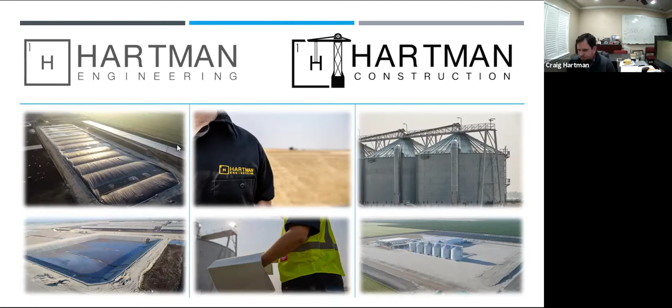I am Craig Hartman, I'm the principal engineer of the company, the CEO, the president. I am the special projects manager, so I get involved in a lot of research and development projects, new markets, new issues, new problems, new regulations. If people get into lawsuits, I usually get involved with those too, as an expert witness in many different lawsuits. It's very interesting. I am a Cal Poly civil engineering graduate of 2004.

And my sidekick for today is Mr. Chris Canada. Oh yeah, I'm Chris Canada. I recently graduated from Fresno State University, 2021. I actually got hired by Craig before I graduated from state, I was actually still taking classes. I passed my EIT about 4 months ago, and I'm an associate office engineer and a lead surveyor. I focused on water resource management and transportation at Lyles College of Engineering, and I really found a good home here at Hartman Engineering.

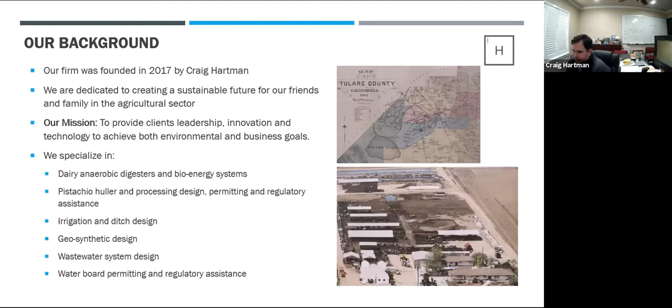So, why Hartman, right? You always want to know the why. You got to ask yourself, why am I getting into something? Why am I doing this?

Why Hartman? Number one, the state of California is suffering a catastrophic water quantity and water quality issue. That's what we're suffering right now.

We're facing this, and I'm going to explain as best I can. Number two, the Earth's climate is changing due to greenhouse gas emissions. I don't want to argue politically on this, but things are changing, and there's an entire movement to seek out and not create CO2 or greenhouse gas emissions, and that's one of the things we do.

So the dairy digesters, if you look at how many we've done nationally and how much emissions we've reduced, we're very high on the climate change reduction list in the nation for what we've already reduced based on those projects. That's exciting to me.

Because of this, we're equipped to assist what I consider the transformation of agriculture. The market is transforming. We want to be a leader. We want to show these folks how to make those moves in the near term to evolve and stay in the game with all these environmental conditions.

So when you put all this together, we do engineering consulting, we do general contracting. And why do people seek us out? It's because we deliver solutions.

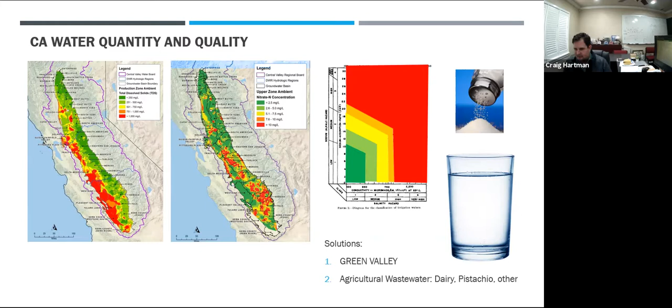So the water in the glass is getting less and less, and the salt shaker is going faster and faster, equaling a compounding issue in which the concentration of salts is exponentially going off the curve. So that is the problem, folks. That is what we're up against, and we're trying to solve it. Next slide, please. So how are we trying to solve it?

In many ways. We do have a project going on at Cal Poly. They have this problem right now. They have farmland, it's almost like a little city, and they're doubling their housing on campus, and they're going to add like 40% more students, and there's no water in the area. So what's the solution? Well, it's something I pitched them as a senior project 16 years ago. So what are we going to do?

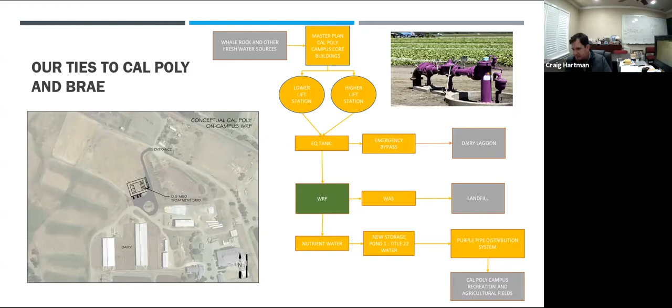And so fundamentally, this is something that we're doing on a project of this scale in a small little city, and we're doing it in many, many other places as well. Next slide. So another aspect of this is the digesters. Yes, we do a lot of digesters. We're good at them.

Fundamentally, they are part of this whole water quality, water quantity item that we're working at. They're working on the nitrogen side of things. We have a video for you to kind of explain this. Chris, can you hit it real quick? And then after the video, I'll get into it.

Farms have a crucial and essential role in being a solution to climate change. I really appreciate BMW's willingness and collaboration in helping us create a viable farming system. Renewable energy is a key component to the sustainability strategy at BMW. The partnership with Straus Organic Dairy Farm through the Low Carbon Fuel Standard program is helping make this a reality here in California. Collaboration is essential to creating this model of a farm to electric vehicle pathway.

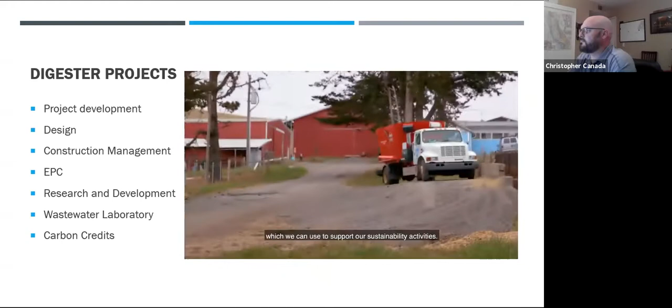The Low Carbon Fuel Standard program provides incentives to automakers to partner with renewable generators to bring more renewable energy to their electric vehicle drivers. Together, through this partnership, Straus and BMW earn credit revenue, which we can use to support our sustainability activities. BMW is using our part of the LCFS credit revenue to provide incentives for drivers who participate in our smart charging program in Northern California.

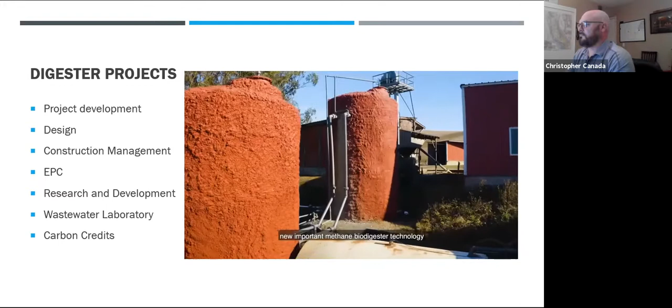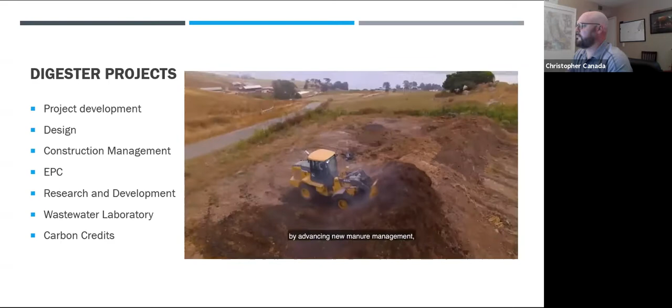The Straus-BMW partnership is allowing Straus Family Creamery to invest time and resources to investigate new important methane biodigester technology that overcomes traditional barriers that have inhibited small organic dairy farmers from adopting this technology in the past. As investment comes in from the Low Carbon Fuel Standard program, organic dairy farmers are able to take that investment and maximize their climate impact by advancing new manure management, carbon sequestration, and methane mitigating solutions.

The exciting thing about dairy biodigesters is that they create a double carbon emission reduction. On the one hand, they capture the manure and methane emissions that would otherwise be released on the farm and go into the atmosphere. And they also can be used to produce electricity, which replaces fossil fuel generation on the grid. Everything we produce goes up through the electric lines and it virtually goes into electric charging stations for BMW cars.

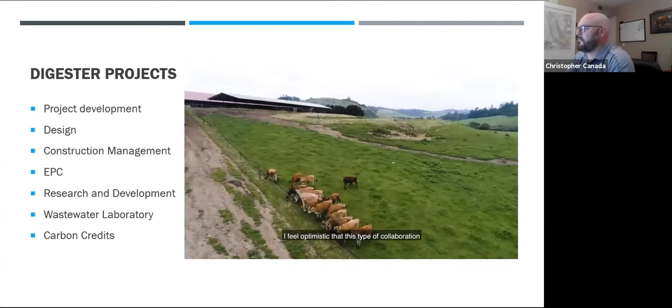I feel optimistic that this type of collaboration and these types of innovations are really going to effect change.

All right, so that is actually one of our projects. The technology there is ours. That is actually one of our laboratories, so we can model different things. And the reason we do that is because it's far from our office and we can show people that we can do things remotely. Because it's easy to do something when it's in your backyard. We used to have that in our backyard pretty much, and so we moved it so that it's 5 hours away. So it shows the ability to do things remotely, and I think that's important.

So we do all aspects from project development all the way through the design, construction management, EPC. So that stands for engineering, procurement, construction. And that's important because an EPC contractor and engineer is somebody that can actually warranty their work. I can warranty how much gas the site's going to make.

And that's a lot of the reason why we are moving up the food chain, or we're moving across the nation, is because a lot of the people that finance these projects are seeing that our warranties are true and some others aren't. And so we're having great success being able to do stuff correctly and warranty it. And by word of mouth, we're expanding in multiple states.

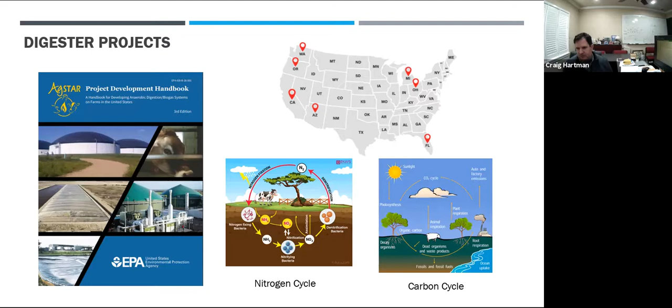Atmospheric deposition. So based upon denitrification, we can volatilize ammonia in a wastewater plant, and then that ammonia will come back down and deposit back into the land, and that's where another component of the nitrogen is coming from.

The largest component is coming from synthetic fertilizer. So where does that come from? Mines in New Mexico, Arizona, Utah. They're mining that with big excavators. They put it on a train. It's petroleum companies that are using a lot of petroleum products. They put that on trains. They bring it to big factories. They refine all this stuff. They make pellets for you, or liquid.

They put it on more trains, trucks, trailers. They take it and then they get it to your field so that they can produce your lettuce and you can eat that lettuce or something like that, right? So that's kind of where that infrastructure is coming from.

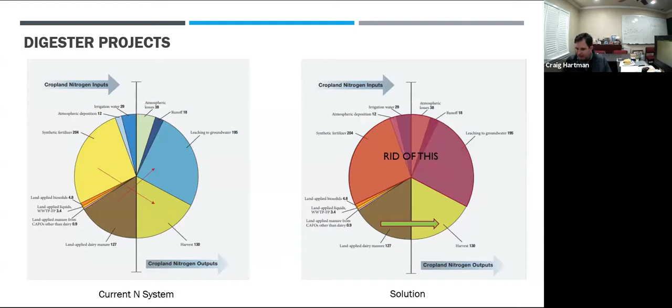Okay, so we're trying to get rid of what we consider the true nitrogen problem here and make this whole thing natural once again. And that's really what we're doing. We're using natural processes, understanding the natural world. We're using gravity and a few minor pumps to do all of this. Next slide.

Chris. All right, so it's kind of my turn here. So I think you can see why my water resource management degree really found a home here. I became an office engineer right out the gate. So the question might be, what does an office engineer at Hartman Engineering do? The short answer is essentially everything. From start to finish, the engineer in the office is in charge of collecting the data to the full creation of the construction set and all the steps in between.

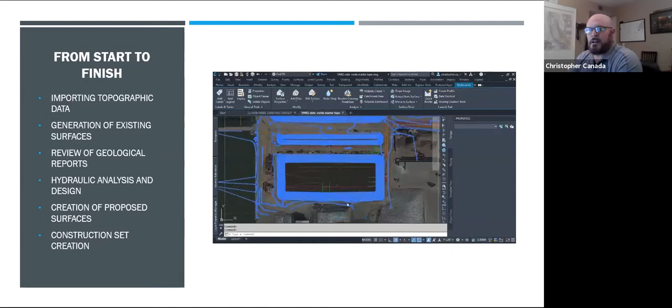So we take the gathered topo data, the topographic data, which is in this raw form you see on the right, which is essentially a point, northing, easting, elevation, and description. And then we import that data into a Civil 3D model. And then by using feature lines, grading features, stepped offsets, point file importing, we create an existing surface. And that surface is going to be used for the entire design of the project.

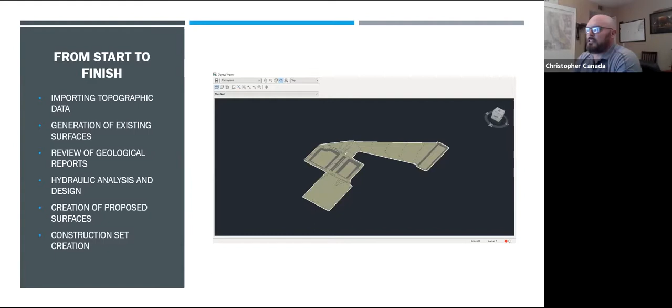So from that point, we review geological reports. And this is important. We take this data and we find out where the elevation of the water table is in the area, or specifically at that point where the digester is going to be. And we need this information because, like Craig said, there's a lot of water board standards and regulations in the state of California where we can't make a digester within 5 feet of an existing groundwater. So with our factor of safety, we create our ponds to be 6.5 feet.

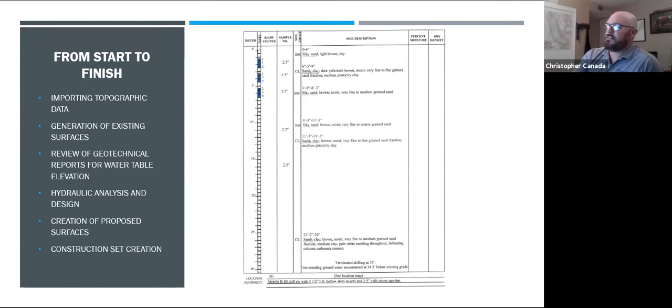So we use this information from this geological report, geotechnical report, to create a hydraulic analysis and design of the system. We can design a depth of pond based on the volume that we need from the wastewater management plan to determine how big the pond has to be, how deep it can be. And from that, we take an evaluation of what's existing on the dairy, and we figure out what will be the hydraulically critical point. And from that, we design the infrastructure for the entire project.

And this is probably the most complicated part of the design here. As an assistant office engineer, you're doing calculations, you're using the Darcy-Weisbach equation, you're using the rational method, all these things that we did in classes, you will use out the gate at Hartman here. So we take all that information and we physically design the system itself. So we're doing engineering out the gate from college right there. So that's the hydraulic analysis and design portion.

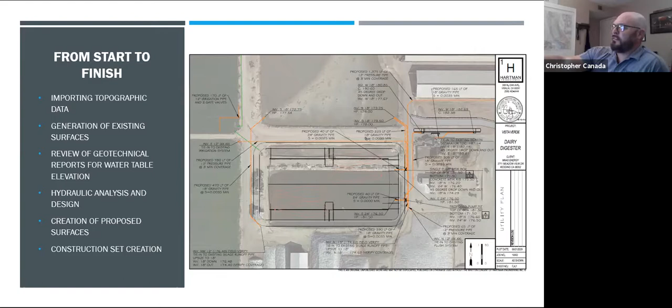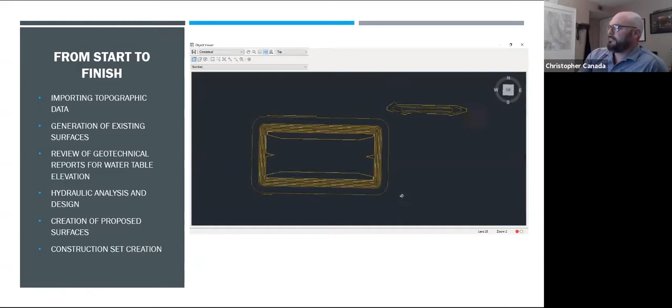All of these annotations here, I'm going to talk about a little bit later, but that's also part of the office engineering purview. So after we design this base and we get all of the elevations of everything scoped out, we're going to create a proposed surface. And it's a similar thing using grading lines and feature lines and grade to elevation, grade to slope. We create a 3-dimensional model of the proposed surface.

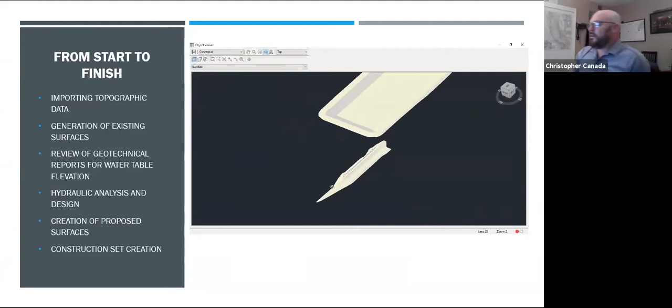So we're going to use this actually for one of the 2 main things that we do as engineers for Hartman Engineering, which is that we want to minimize the amount of pumps on a system, because it's going to be a recurring cost for the dairy owner. So everything we're trying to do here is to mitigate the cost for the farmer and for construction overall.

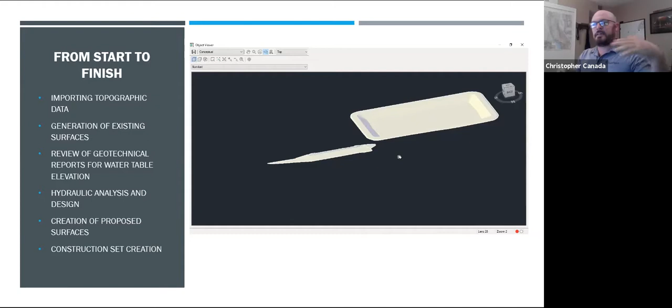So when we're doing the analysis, we create these models so we can determine A, the volume of the digester, B, the dirt balance of the digester, and C, just to ensure that we're going to minimize the amount of pumps that we need to get water from the beginning of the process, which would be like a separator, a fiber separator, to the actual digester.

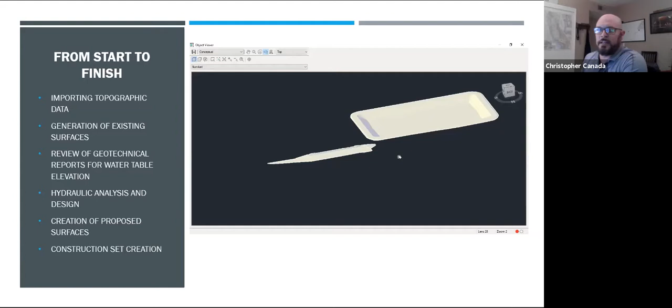So the minimum amount of pumps and the optimization of the dirt balance is what we do when we create the proposed surfaces. We're trying to maximize the dirt balance, and we're trying to minimize the amount of pumps, and that goes all into the design and analysis. And that's kind of out the gate doing that analysis and design with the projects there.

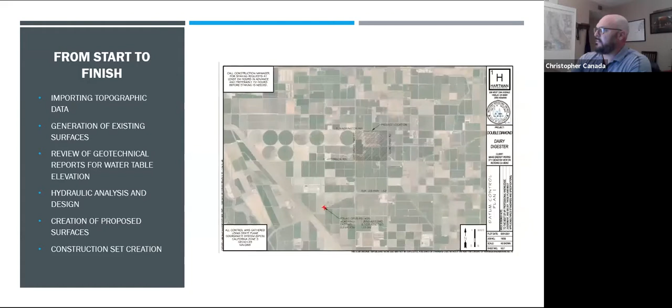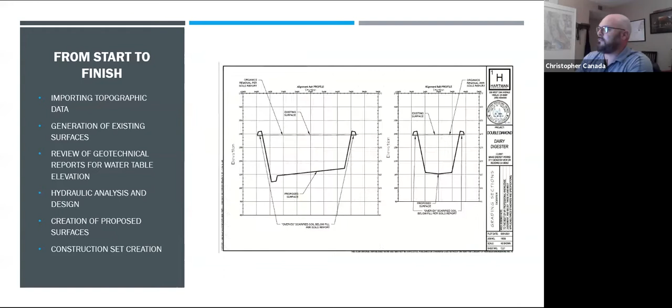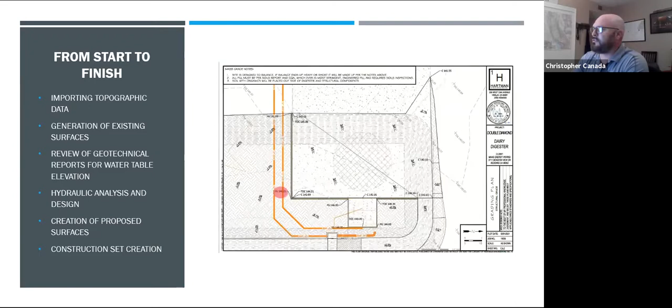And then from there, we go into creating an entire construction set. So we're going to be annotating, scaling, rotating images, making sure that all of the points and labels and callouts are accurate to the design and to what we're asking for. We make alignments, profile views, all of it's going to be used in the construction set that we're going to send out to a client that's going to be used to physically construct the dairy digester that we are designing.

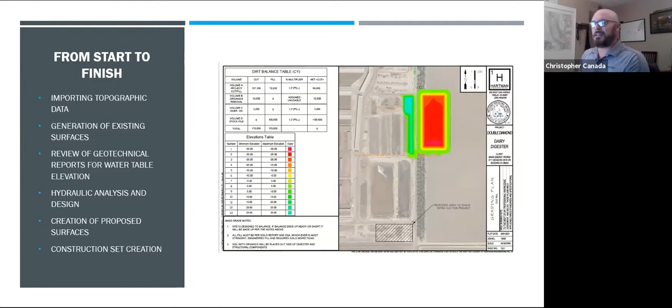And I think that's one of the best parts about working at Hartman is that because we are an engineering and construction firm, we get to start the project from raw land, analyze the data, take the topographic information, bring it back, create the surfaces, design the models, make the construction set, give it out, and then in the end, we get to watch the fruits of our labor.

So this is actually a good dairy. It's actually on our website. This is called Double Diamond. It's a dairy here in the San Joaquin Valley, but it's a very large dairy. 2 megawatts of electricity is produced on this dairy farm, but we get to see it from the beginning to the end. So there's kind of a video of that at the end.

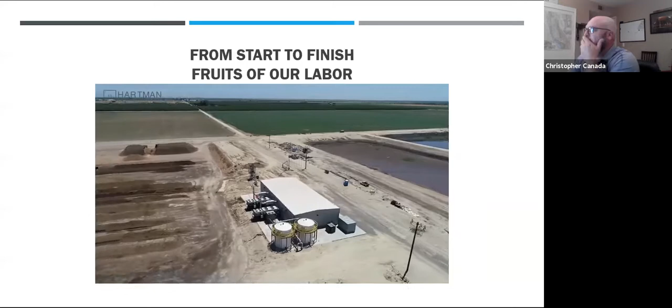Yeah, so I think that coming from college and having ideas about environmentalism and water resource management, seeing stats like that at the end of that video really shows that it's not far from reachable. It's something that we do right here, and it's not far from your university life, and it's attainable.

And although those skills or all that work might seem kind of unknown to you at the moment, I know that I didn't have a lot of experience with construction sets or even Civil 3D. I had a very basic knowledge of that, and I feel like that's a general college graduate kind of concept. Even Cal Poly students that we work with right now that just graduated have a very rudimentary understanding of Civil 3D when they walk in the door. But the great thing about Hartman is that we do provide an amazing training program.

Yeah, so essentially you're getting a crash course in engineering, Civil 3D, and how Hartman really wants the design of the construction set and the modeling all created. We get that in essentially 90 days. I created my first construction set from nothing between my 60 and 90 day. I was already doing a construction set. So it's there. The facilities are available for us.